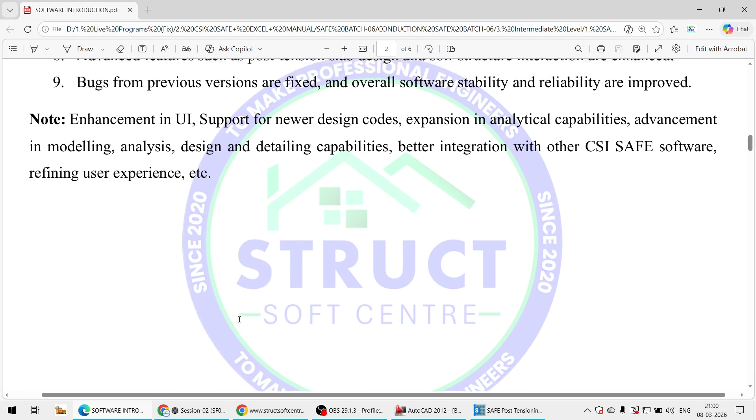First of all, we would like to recall all the things that we have covered in our last session. In the last session, we started the discussion about understanding this CSI Safe software, its introduction, its history, its full form, its application, and why this software is popularly used in industry for the purpose of designing substructure.

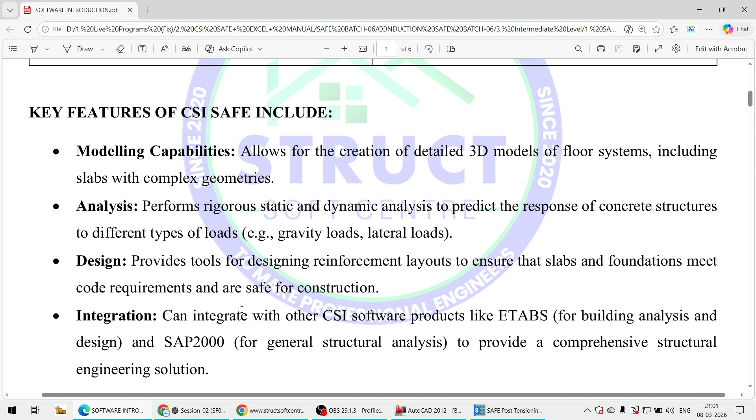Moreover to this, we were trying to understand the features of this CSI Safe software for designing your floor slab and foundation slab, and what features actually keep this software different than the other software options. So that we have learned in our last session.

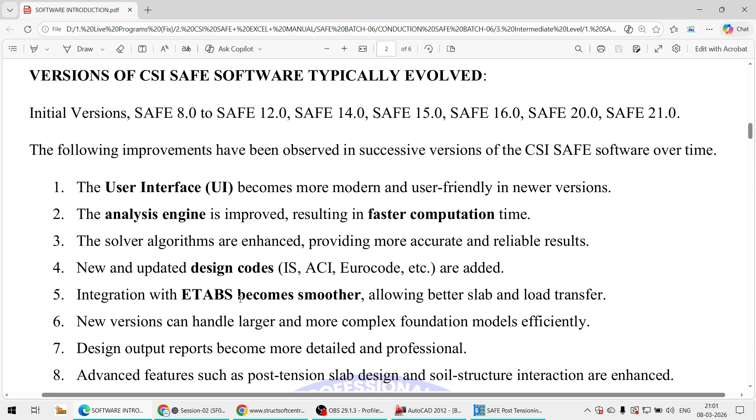Moreover to that, we were trying to understand, if you are going to work with different versions of CSI Safe software, what advancements, new things, and changes you will get in a new version over the oldest version. That also we were trying to understand.

By following all those things, we have learned how you can initiate this particular software, start this software with internet connection and without internet connection, and how the welcome screen of the software will be. That we were trying to understand in our last session.

Further, we have seen the interface, the user interface of this CSI Safe software in detail in our last session, and we concluded our last session on the point that we have to discuss the important commands of this CSI Safe software.

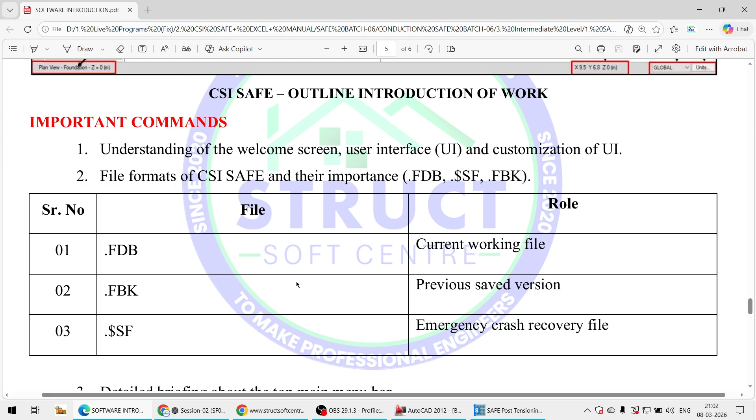So shall we finally start to discuss about the important commands of this CSI Safe software? Yes or no? Okay guys.

So next, the very first thing is to understand the welcome screen, user interface, and customization of the user interface of your Safe software.

As we have seen in our last session, when you open the Safe software, suppose I am going to close this software and freshly open it again. Once you click over this icon, it is going to be initiated, and this kind of welcome screen will be there. There is an option to start your new model, an option to start your existing model, and here the recent model files are actually available. I wanted to open this one.

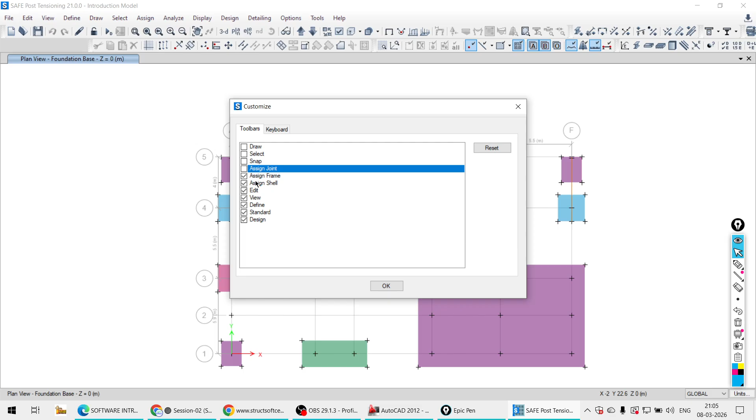Suppose here I would like to go to customize toolbar, so uncheck all of these things. When you are going to open your newly installed Safe software, this kind of interface you will get. There will be no quick access bar, no modeling option bars available, nothing is actually available. Only the top main menu bar will be available.

This is called the top main menu bar, as I earlier said. Now with the help of this top main menu bar, you can do everything, you can do anything, but it will be difficult. Why? Because every time you need to go to particular main bars or main options, and under that find the sub option. In the Define section, suppose I have to define the material property, so I should have to find the material property.

For the section property, I should have to find the section property. If I have to import something, I need to go to file, then I need to go to import.

If I want to edit this particular slab, I don't have the quick access bar, I don't have the shortcut key. If I have to model the slab, model the column, do any correction, do the joint modeling, or see this particular dimension, for doing anything, I need to go to a particular option.

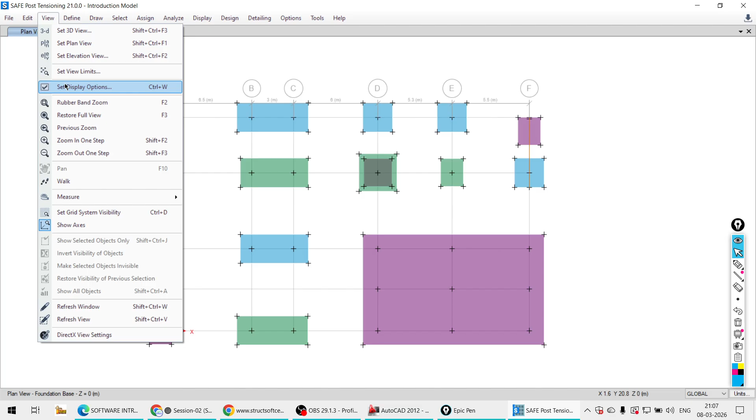So for the editing option, I need to go to edit option, and in that edit option you will get multiple options to operate. For the view option, if I click over view, these are the view options.

If you want to see the 3D view, the quick access bar is not there. Just now to create the 3D view, I simply clicked over the 3D option, so the 3D view got enabled. Now I cannot easily convert this plan view to the 3D view. I need to go to view and then change it to the 3D view. That is the problem.

Every time I need to go to main bars. In the define section, I need to go to define section, then I can define the material property, section property, load pattern property. If any option can be quickly accessed, my work time is going to be reduced. Then there is a define section.

In the define section, draw section is there. If I need to draw any plan slab, any beam, any reference line, dimension line, or reference grids, how can I do that? If I need to create any joint at any particular point to connect two joints, I need to draw the line. How can I do that?

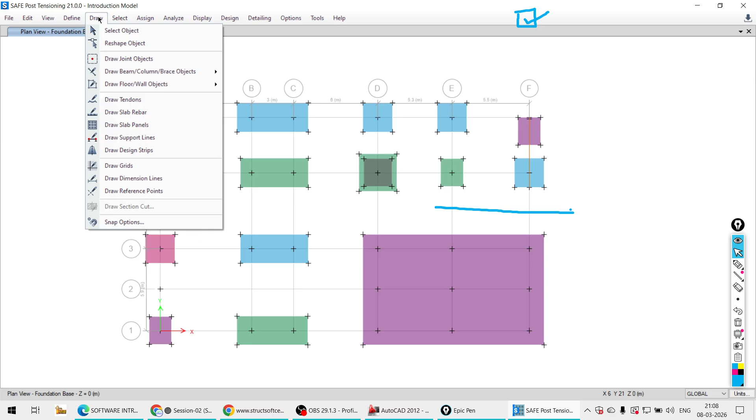I need to do it from the draw options, so I need to go to the draw option, then I will come to know all the options. Assign option is there, analyzing option is there, display option is there, design option is there. All these are the main options, and under each main option you get sub options. In design, all the options you will find under the design section.

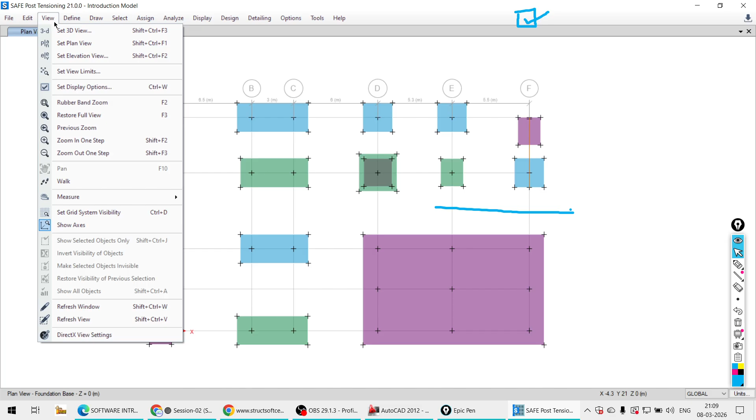These are all the options, you can call them sections: define section, draw section, select section, assign section. If I want to assign the point load, uniformly distributed load, area load, whatever type of load you need to assign, you need to go to the assign section.

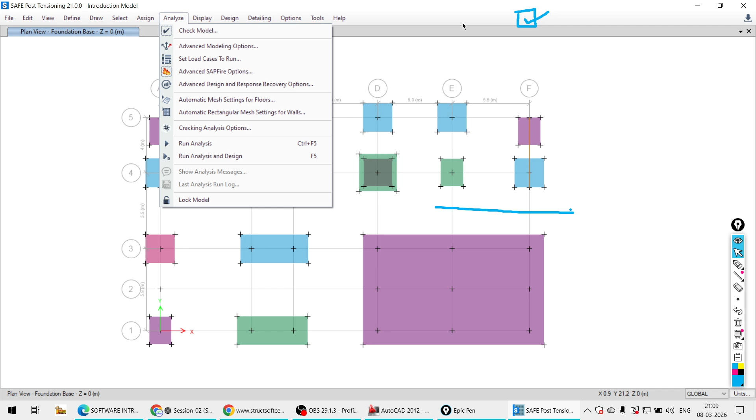There is no quick access bar, there is no shortcut key. So that is the need to have the shortcut keys, or otherwise to have the quick access bar. So we need to set the quick access bar first. If your welcome screen is your user interface when you open the software, and suppose it is newly installed, you will not have your customization, your quick access bar - that you won't be having.

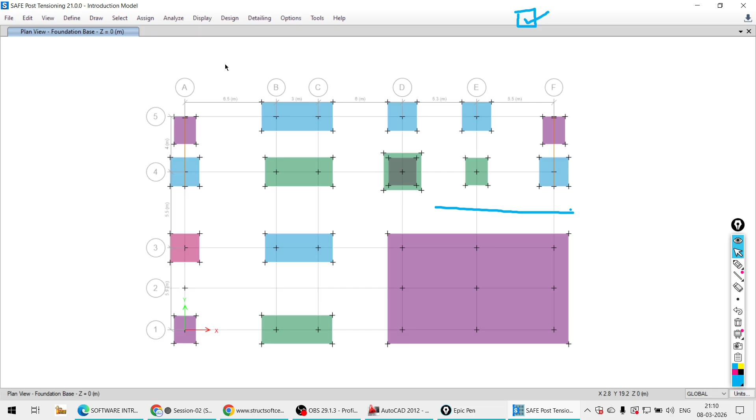Where will you get this quick access bar? Very simple - where the option is given, you need to go to the option. In option many things are there, one by one we will see. In option you will find the option of customize toolbar. Click over this customize toolbar.

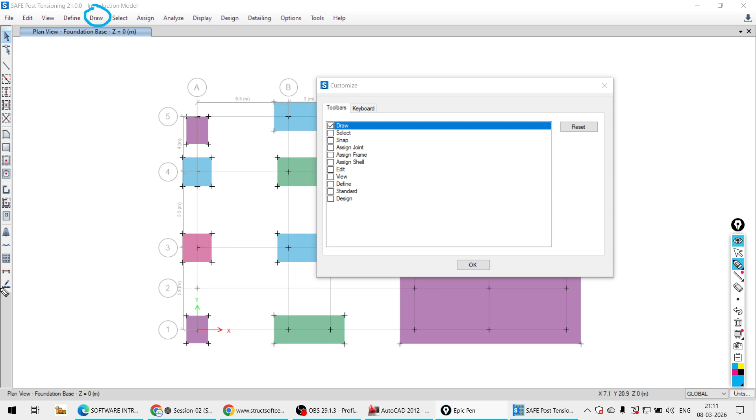In this customize toolbar there is an option of draw section on the left hand side. It is now created or added here. Draw section, this is our draw main option. Under this main section there are sub options. All those sub options are extracted in a quick access form in this draw option strip. Okay, now second, select option.

If you want to do anything selected, if anything to be deselected, whatever is actually present, and if you wanted to select all the things at once, all that you will be able to get from the select option.

So the select option bar here, it is now added. Now next, snap option, assign joints, assign frame, assign shell. If anything you want to assign to the joint, if anything you want to assign to the frame, if anything you want to assign to the shell. Assignment, okay, property assignment, load assignment, label assignment, anything assignment. Okay, see, try to understand when you are going to work with the software, whenever you want to do anything, right?

So first thing you need to define it, second thing you need to assign it, third thing you need to edit or correct it, and the fourth thing is to do the analysis, then design, then scheduling and detailing. So first thing is the modeling, drawing option. Second option is the define option. Here the define section is there. See, define section I am going to add here as a define section. Thereafter draw option is there, that is nothing but your draw option.

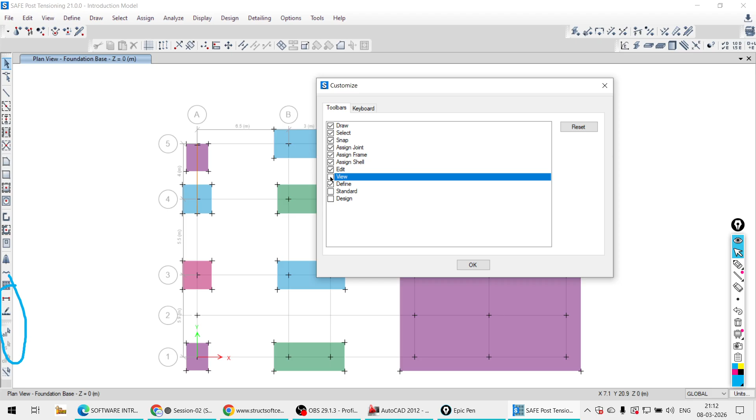Thereafter is the editing option. If you want to do anything to be edited, thereafter you need to do the assignment. Okay, load assignment, property assignment, everything. Thereafter is what? View option. What things you want to keep in view, what things you don't want to keep in view. So view option, then standard option, then design option. So all the quick access bars and quick options are actually added here.

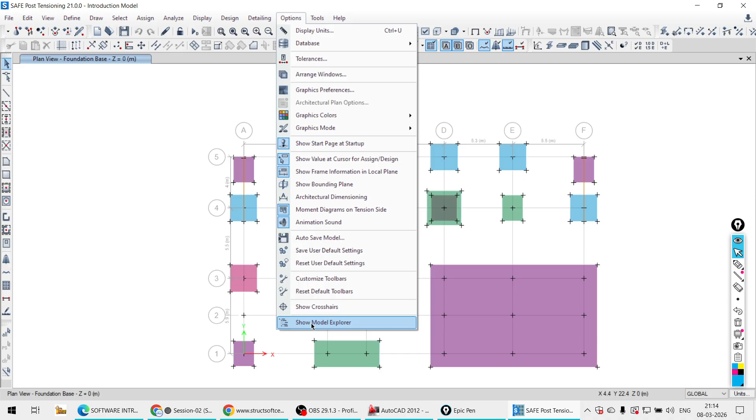Now second thing, you may have seen any of the videos or you are going to see other videos for learning, and you will say, sir, when I see that video, I am getting one section here, model explorer, but in our software it is not available. So suppose you want to have the model explorer to do the things quickly, that is also one option. So go to the options, and here you will get the option of show model explorer. Once you click on show model explorer, now here it is easily available. Model explorer, model property, structure property, properties, grouping, loads, and many things are there.

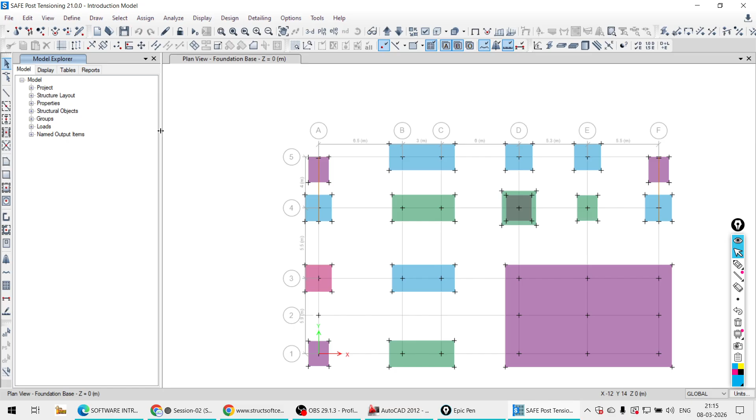What its application is, I will explain later. मैं इसका application बताऊंगा. Okay, if you are interested to work with the model explorer, you can proceed in this way, but I am not practicing with the model explorer, so I don't need it. So what I can do, I can close it. You will say, sir, no, I am familiar with the model explorer. No problem, go to the options, go to show model explorer. Now here it is added. If you don't want to work with this, close it. Understood? Yes or no? Model explorer.

Okay, this is the interface setting. Clear? After this, let me show you. Welcome screen we have seen, user interface we have seen, and its customization we have seen, and whatever further things need to be discussed, we will discuss in time. Okay, second, file formats of your CSI SAFE software and their importance. Guys, very important point we are going to discuss. Please pay attention. What are the different file formats of your CSI SAFE software?

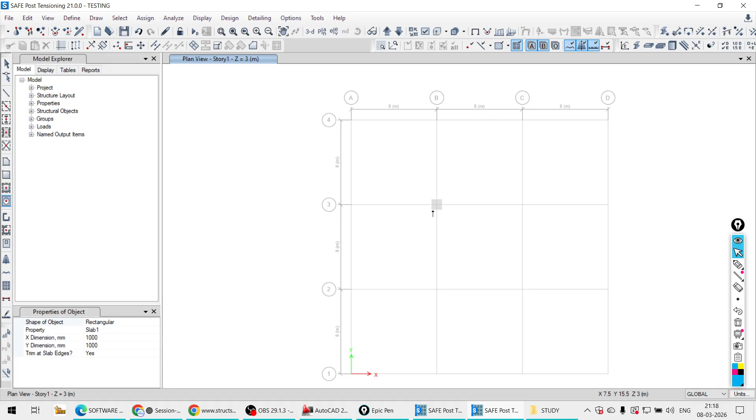3 files are there. Okay, now in this new project, just for understanding, I am going to draw the slab. This is the slab, and I am going to perform the analysis. It is showing the errors and things. Let the analysis be completed. Okay, so the analysis has been done.

Go to your folder. Now guys, how many files are there? How many files are there? The files are present. One file is still not created. Okay, now unlock this model. See here, no backup file is available, the FBK file. I'm trying to see whether the backup file is created or not. The backup file is not created, so I'm going to do a modification in this.

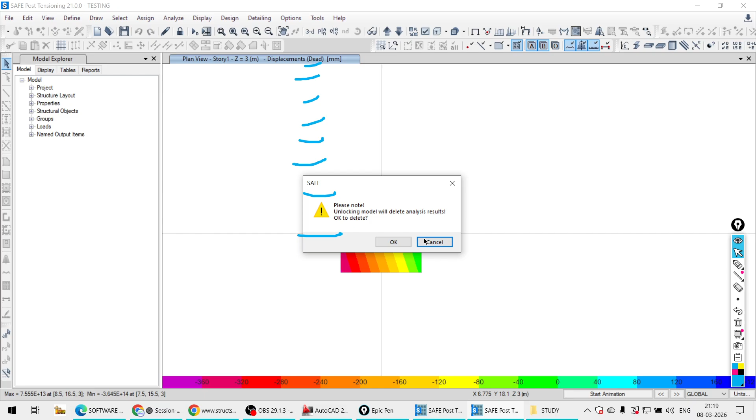Okay, I'm going to create the column. Now perform the analysis. Let the analysis complete. Okay, now go to your study folder. The backup file is not created, but let's see. There is one $sf file, one safe.fdb file, and one more file will be created by the software when you actually work on a real project. Here we have not done anything, that's why that file is not created. One more file will be created here as the fbk file, which is called the backup file.

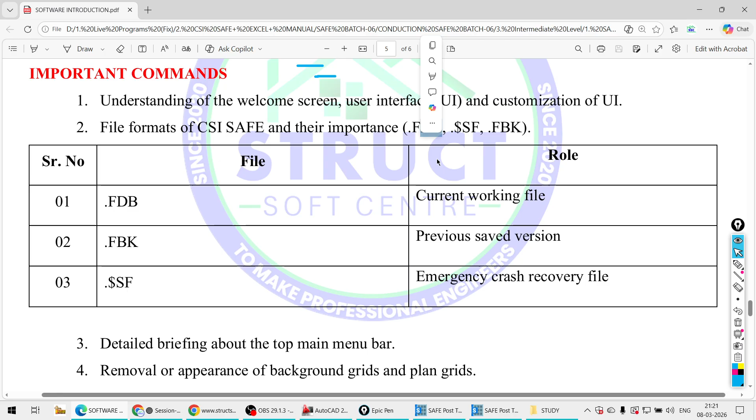This is the model file, and this is also a model file, but their applications are different. Let me show you my project. Here, general. Yes, see what files are available: $sf file, fbk file, and fdb file. The fdb is your current model file, where you are working right now. The file is created in the fdb file format.

Now suppose you are going to do any modification, the previous file is going to be updated as an fbk file. The previous edition or correction is going to be updated as the fbk file, which will be your backup file. This is your current ongoing file.

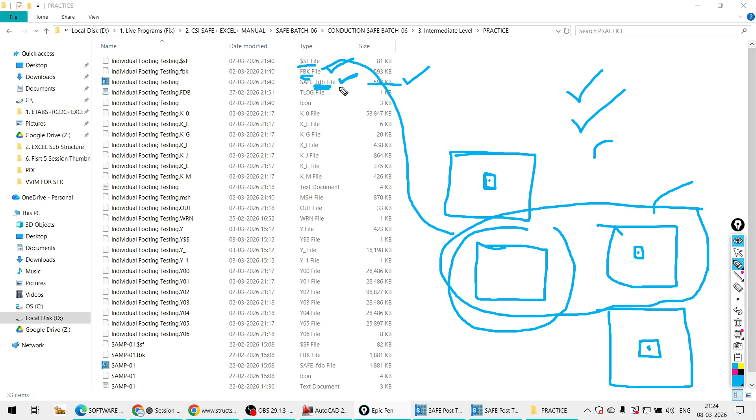FDB. That is going to be updated as what, FDB. Understood?

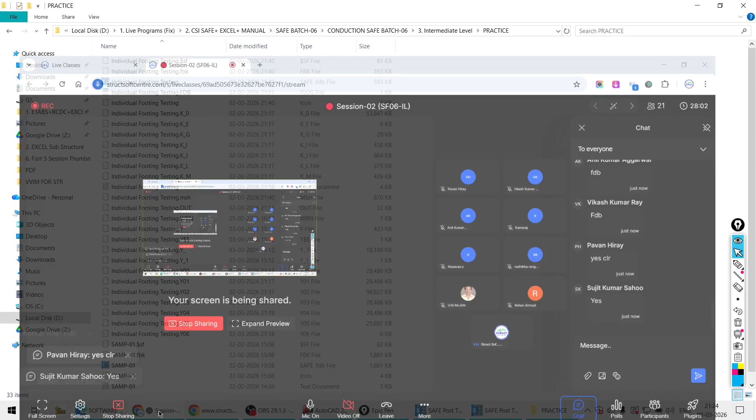Why we are learning this? Okay, what is the application of this? So let's try to understand what is the application of this. For example guys, you are working over this particular project, and by any reason, by any chance, by any mistake, your ongoing project is crashed. Suppose you are working and suddenly the light cutoff is there, power cutoff is there.

So sometimes your file will be what? Crashed. When you are trying to open that file, it will not open. First thing. Second thing, there are some situations where suppose you are going to execute anything and that thing cannot be undone. Like for an example in the ETABS software, suppose you are going to create a model.

Once you create your model, there is an option to assign the fixed support at the base. Or tell me, at any other level you are assigning the fixed support, or only at the base you are assigning? Fast, hurry up. You are assigning the fixed support at the base or at any of the levels? Now what thing is needed to do?

Now in between one more file here, it is going to be created by the software as $SF file, and when suppose you are using the ETABS, so $ET file. As it is SAFE software, so it is creating the $SF file. Now what is its application? So it is just similar to that of your FDB file and this SF file. So it is another version, another mode of the file.

Okay, so whenever you have to share your file with someone else who is using any other version, or you are not knowing what version of the software he is using.

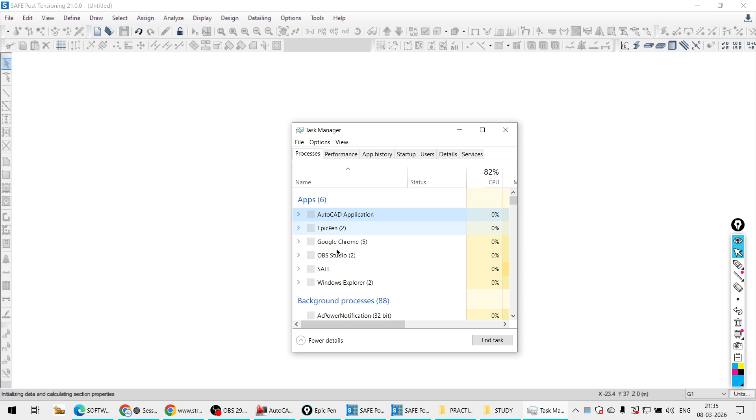Okay, what is happening? Okay, let me open, save again.

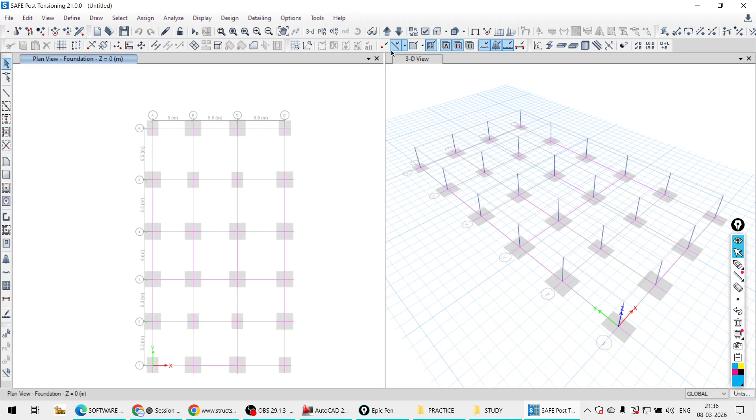So suppose you have shared me the file, so I will go to import. In import, the $SF file I need to find from a particular folder, wherever you have downloaded it. Suppose this is it. See, master sample, open this. See, your entire project here, it is opened or not? Your whole project has opened, yes or no?

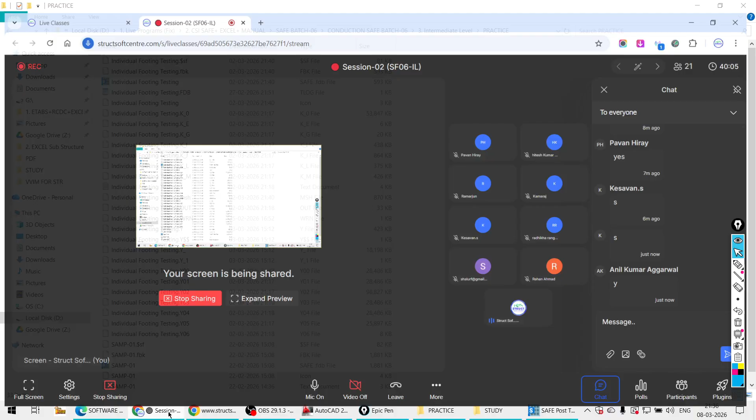Clear? So this is the application of these three file formats: the .$SF file, the .FBK file and the .FDB file. Clear guys? Understood the meaning of all three? Yes or no, Pavan? And all these things are applicable for your ETABS as well. The same things happen in ETABS. Okay, fine. Now, what is the next point?

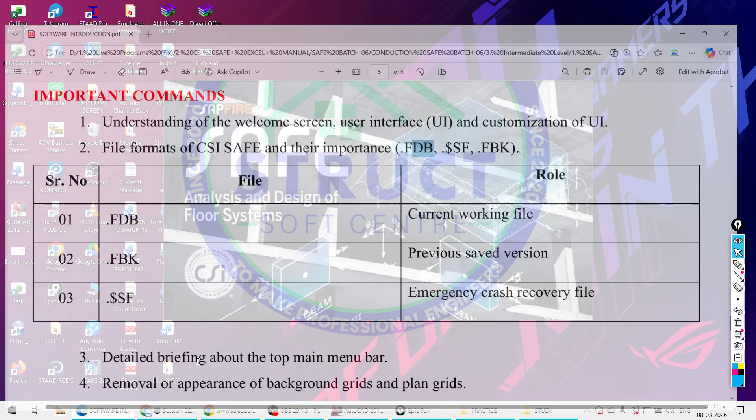Detailed briefing about the top main menu bar. We already have covered this point. Removal or appearance of the background grids and plan grids. Grids are a very important thing when you are going to initiate any new project, when you are going to initiate the modeling work. Without having the grid, you cannot create the model effectively. You cannot create your model with a surety of making your modeling work free of error.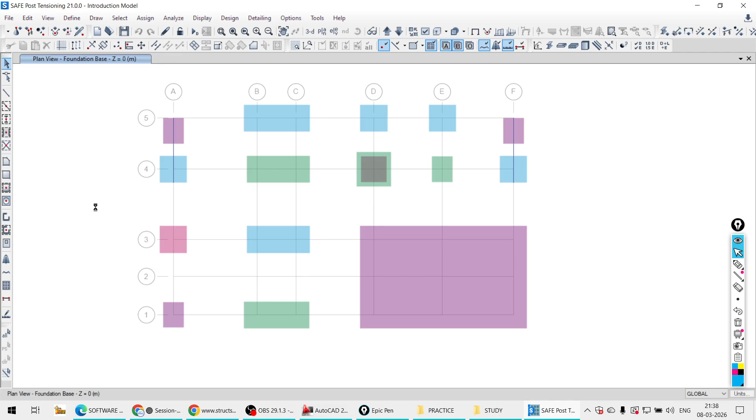If you don't take the help of the grid, there will be chances of modeling error, analysis error, design error. Many challenges will be there if you are not going to take the help of the grids, or in other words, the reference lines. So the grids are very much important. As you can see here, there is a presence of the grids. These are the grids, the gray lines available here.

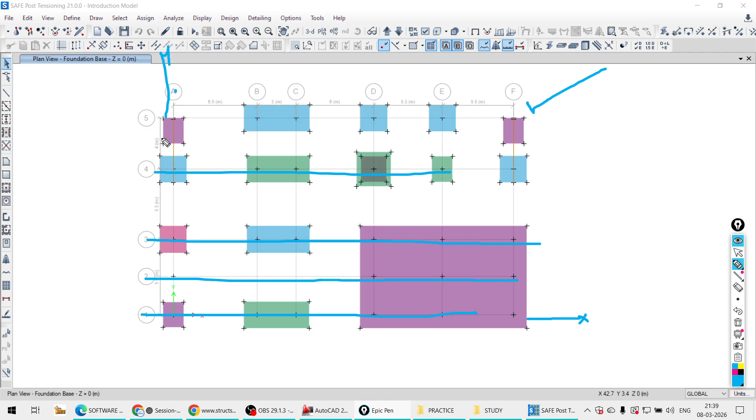These are the grids, and they will be available in both directions, x direction and y direction, and this particular format of the grid is called the Cartesian form of the grid. Means the grids are available in x direction and in y direction. In plan, the principal directions: this is the x direction, this is your y direction. So this is the Cartesian form of the grid. So how to keep these grids in view, how to keep them out of view?

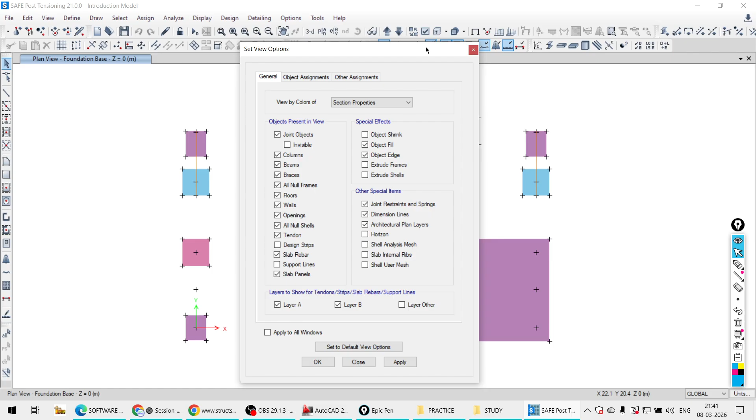Background grids - if you need them in the background, you need to go to set view options. This is all about the view we are learning about. So for that reason you need to go to view, and in view you will find the option of set view options. Whatever display settings you need, you will get from this option. Many things are actually present here, we will discuss that later.

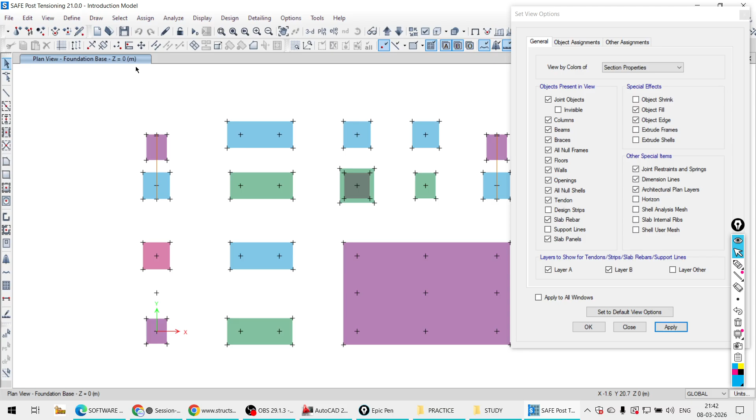So here, horizon - once you click over this horizon, let's say apply. See, background grids are available. These lines, not the grid, these are reference lines, having another purpose, we'll see that later. So how to keep in view - horizon on, horizon off. This is off, this is on. You need to click over apply. Once you uncheck this box and apply, it will not be in view. Once you check this and click apply, it will be in view.

So this background tracing or gridding - background gridding and the front griddings or grids or reference lines, how to enable that - right click on the window and set grid system visibility. Have you got this? So I don't need this background horizons, so I need to uncheck this and apply. This is all done. Clear guys?

This second thing. Okay, what next?

Global axis, local axis, natural axis and their appearance and disappearance in the software. How many of you don't know the definition of global axis, local axis, natural axis?

Who knows, who doesn't know? Hurry up fast, just write in the chat box. Knowing or not knowing, write fast, otherwise I will skip it because it is very basic. Those who know say knowing, and not knowing - hurry up.

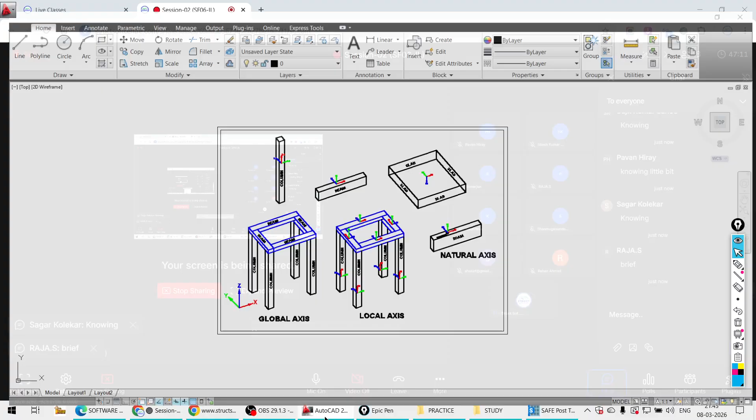All are not responding. Only a few responded, so I'm going to skip it. Knowing - most of you are knowing. Okay, no problem, I'm giving a brief knowing, little bit. It's very simple. Okay, brief, actually it's a very simple thing.

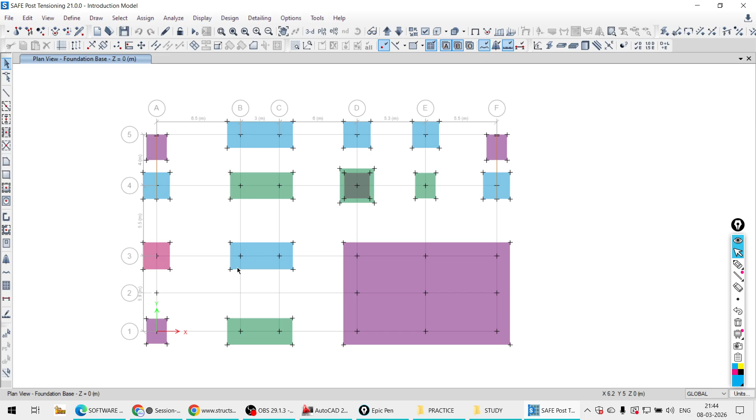Global axis - by the name you can understand it represents your structure globally, your project globally, or the axis system which covers your structure, or represents your entire model, your entire project. That axis system is called the global axis system. So when you see it in your SAFE software, in a plan view, the axis system is present here. When you see the 3D view, this axis system is present in 3D view as well.

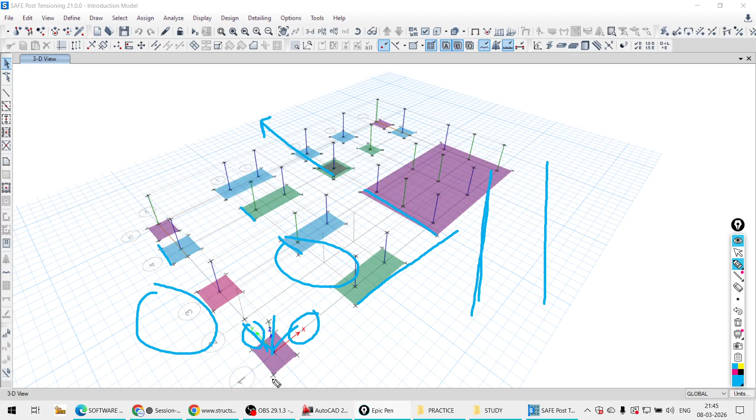So it is globally going to represent your entire model. Whatever is running in this particular direction is along the x direction. Whatever dimension runs in this other direction is along the y direction, global y direction. All the things you model over the height, that is along the z direction. So in the entire structure, whatever goes up is along the global z direction, global x direction, global y direction. This is the global axis, representing the entire structure. This is called the global axis system.

And second is your local axis system - this axis, see this main model is made up of different elements. What is it made of? It is a solid model, solid structure, made up of solid elements - beam, column, slab, footing - all the elements actually have 3 dimensions, they are solid elements. So it has its own axis system. Since it's a solid element, it will have its own axis system - so each column has its own axis system.

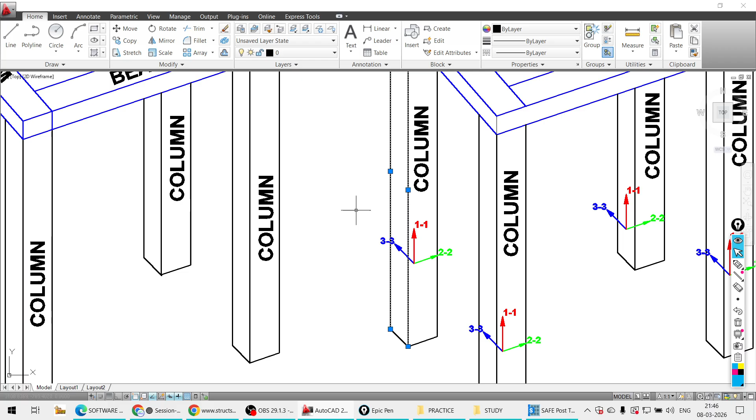Each column, each beam, each slab, each footing, each shear wall - all these things have their own axis system. Why? Because this column has width, this column has length, this column has height or depth. So to define these dimensions, each element has its own axis.

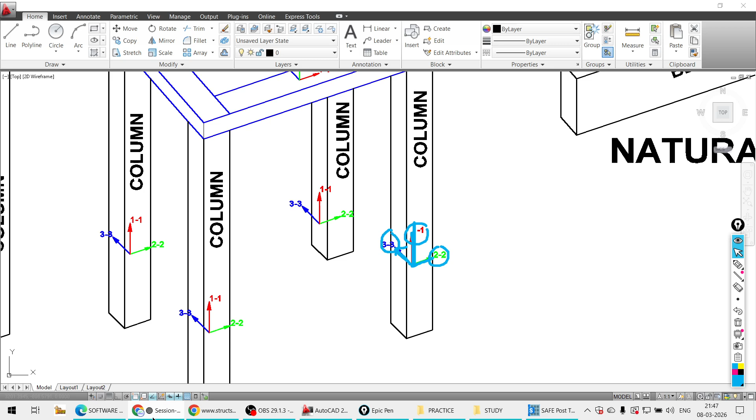So the axis system which represents an individual element, what is that going to be called? Local axis system. Every member will have its own axis, that is going to be called local axis.

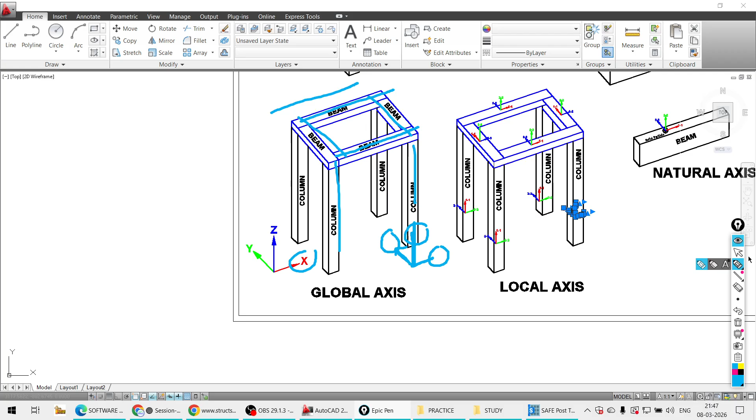Now this axis is not having any concern with the other element, other component part. It has nothing to do with others. It is only having concern with this respective element, respective column, respective beam, that's it. So this is going to be called local axis.

And again guys, this particular element - firstly the entire model is made up of solid elements. Now this solid element is actually made up of solid particles, yes or not? It is made up of solid particles. And this solid particle will also have its own axis system. Every solid particle together will form your particular member.

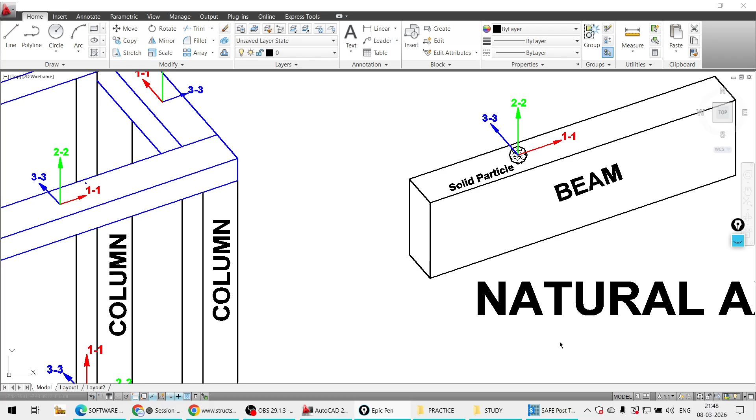So this particular solid particle is having its own axis system, and it is going to be represented by its own axis system, and that axis is called natural axis system. But in software it is not needed to see the natural axis for any particular element. Our concern and study will be limited to global axis.

Our study will be limited to your local axis as well. We need these two axes, we have to focus on these. So in the software, how will you see the local axis of your particular member and global axis, and how to keep it in view, how to remove it from view - you need to understand that.

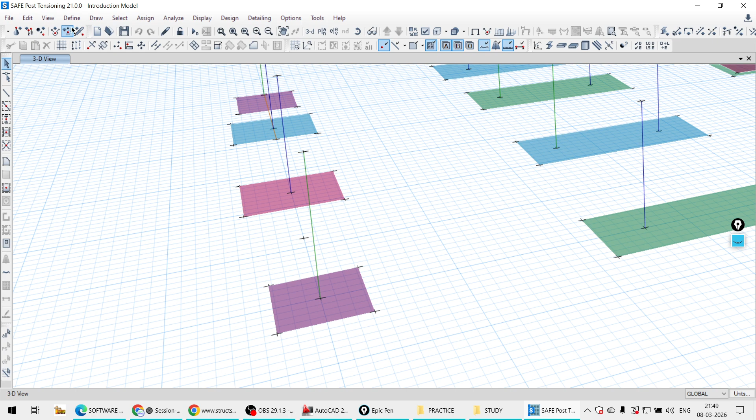So first of all, let me turn off the grids. So this is global axis. Suppose I don't want to keep it in view, go to view and show axis. Once you click over this, it will be off, it will not be in view. Go to view again, there is an option of show axis. It is off, now it is available. Once you go to show axis, now it is not available. Once you go to show axis again, now it is available. Clear, yes or no? This is global.

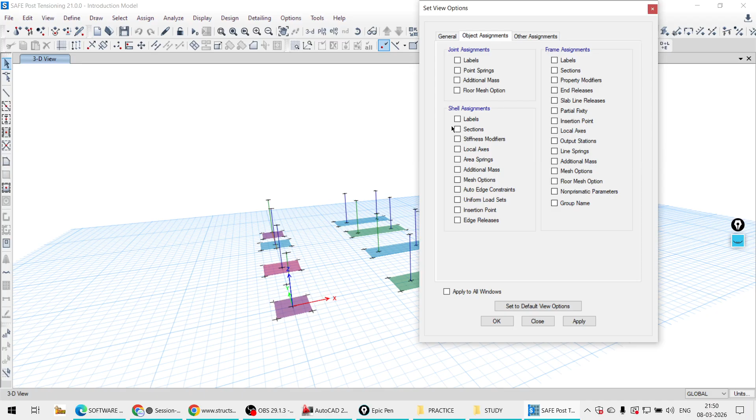Now object assignment - in object assignment I want to see the local axis of the slab element, shell element or slab element. Apply local axis over this. So look, every slab's own axis system is visible to you. This is the global axis, this is the global axis, and now each slab has its own axis system, yes or no? Every slab's own axis system is visible.

Yes, this is the axis system, its own axis system. You will say, sir, for the column it is not visible. Yes, column is a frame element, so I need to choose frame. For the frame element I want to see the local axis - check this, apply. Now look, the local axis of all frames is also visible to you.

Yes, if there is a beam, that beam will also show its own axis here. This is the beam, right click show selected object - see here is the beam, it's showing the local axis of this beam. Because beam and column the software is treating as frame elements, so it is showing here. Getting the point? So local axis of your shell element means the slab element or shear wall element, and the second one is your local axis of your frame element.

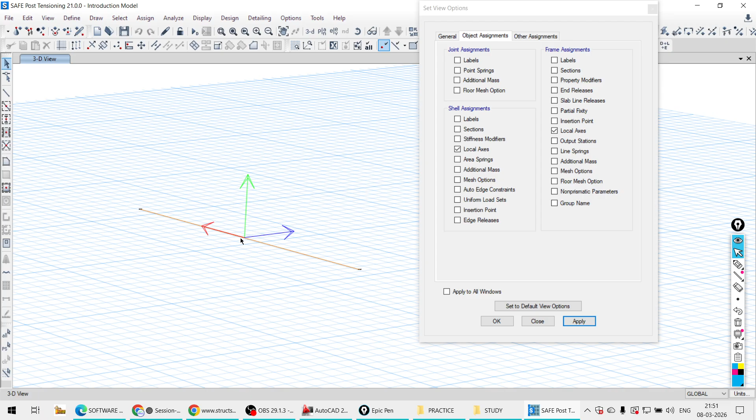And if you want to see the global axis, it is also present here. You will say that sir, I don't want to see this global axis - go to view and say show axis, it will not be in view, right? So right click show all object, now everything is there.

So hope that's clear to all of you - what does mean by the local axis, what does mean by the global axis, what does mean by the natural axis. Okay, graphic preferences, graphic mode and graphic color. Now coming back to the

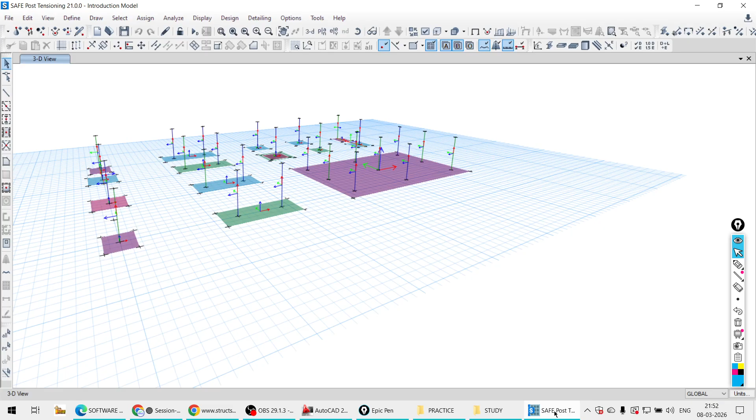software, go to the plan. Very important thing guys. Undeformed shape, normal view, go to set view options. I don't want to see the local axis of shell and frame, so I'm going to uncheck this and apply. Now it will not be in view.

Graphic preferences. Go to option, graphic mode. You should always work with the standard graphic. Please pay your attention, I'm telling you a very important option here.

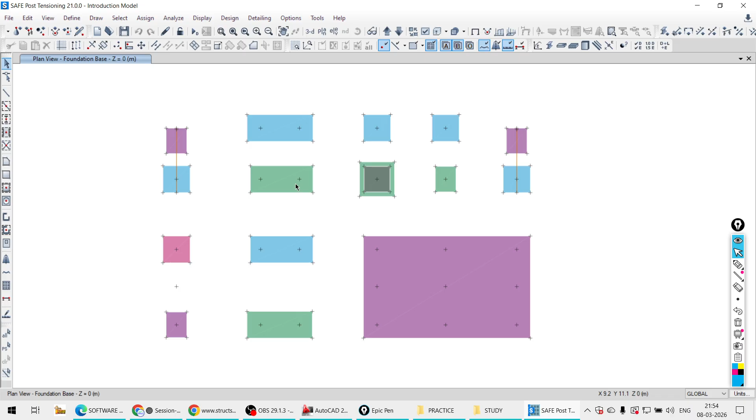For the beam case, now here it is visible. Here it is visible, midpoint. Here it is visible - now it is showing for me.

But sometimes students, when they open the model file in this DirectX form - go to option graphic mode, DirectX form - they are not able to get their midpoints. Their midpoint doesn't show at all, even though they have selected the option line ends and midpoint. This option, even if it is selected, as it is showing here, it's fine for me telling, but normally this problem happens. Many times students send screenshots saying sir, I am not getting the midpoint, I have done everything you explained, but I am not getting the midpoint.

Why? So I instruct them, please go to graphic mode and keep it to standard graphic. Once you click on standard graphic, now here it is clearly visible, and with this option it is easy to execute everything. Understood? The view will be very clear. But if you work with the DirectX option, it will be in a blurred form and it has another application issue.

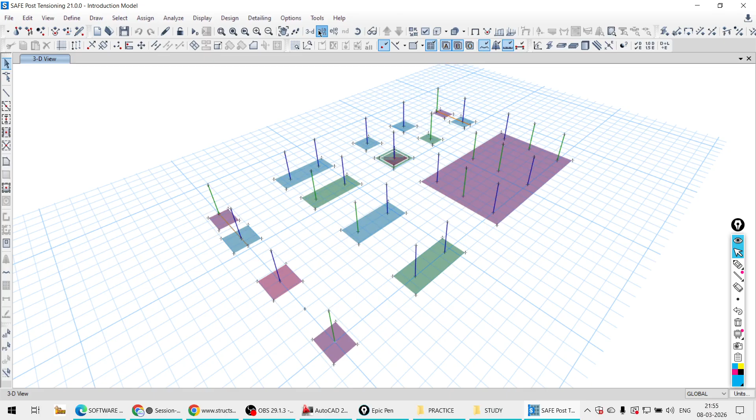So don't work with that. Look at the 3D view - it will be very difficult. Go to the plan view. So you should always work with the standard graphics. Clear? Whether you are working with ETABS or working with SAFE.

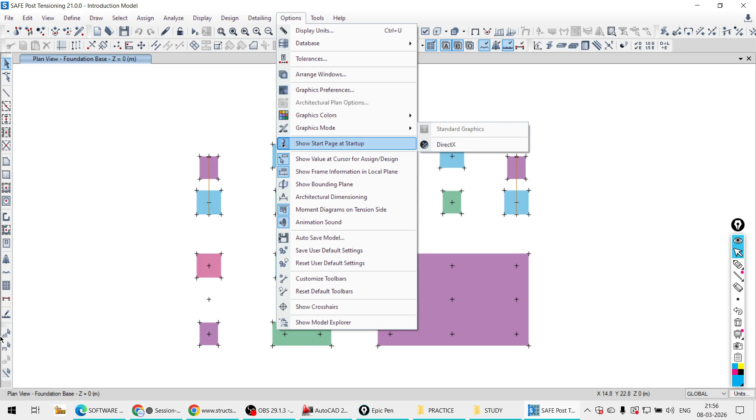Okay, it is only the view option. Okay, analysis, modeling पे कुछ फर्क नहीं पड़ता है. It is just the view option. So always work with the standard graphic option. हमेशा standard graphic option के साथ ही आपको work करना है. Got this? Right click, set grid system visibility. Okay, so now grids are available.

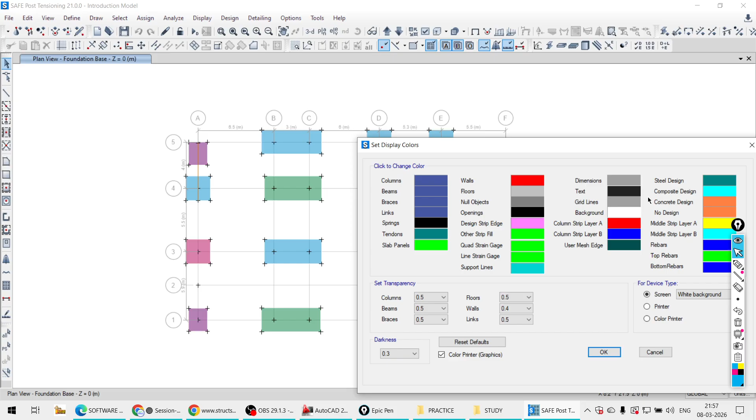Second option, go to option graphic colors. अभी front में आपको graphic colors क्या चाहिए? So very first display colors. Very interesting guys. Now you will say that sir, as I have created the grids, this grid is of gray color. Why is it of gray color? I want to have another color. So here, actually the grid color option is another one. Okay, so when you are going to see, grid color is there, and go to your option graphic color, display graphic color.

Okay, so जब आप by default slab को मॉडल करते हो, फाउंडेशन स्लैब को मॉडल करते हो, तो the floor slab by default color will be your gray one. कैसा दिखता है? ग्रे. You will say that sir, whenever I am going to model the slab with a default setting, the slab default color should be, let's say, green color. Okay, so यहाँ पे मैं इसको default as green कर देता हूँ. Okay, got this? Here beam I have modeled, so the beam default color is blue. You will say that sir no, whenever I am going to model the beam, that should be of red color. वो रेड कलर का होना चाहिए.

इफ़ यू आर गोइंग टू टेक ए प्रिंट, अब प्रिंट में सपोज यू आर नॉट हैविंग द कलर प्रिंटर, black and white printer you are having, so column will be of this color, beam will be of this color, bracing will be of this color. तो ये आप changes कर सकते हो. What element you want to show as dark, what element you want to show as light, everything you will get from here. यहाँ से आपको मिल जाएगा. If you are having the color printer and you want to export your model, आपको ये मॉडल को एक्सपोर्ट करना है, इसका प्रिंट लेना है.

So if you are going to work with the color printer, the column is going to be printed as blue, the beam is going to be printed. Now I wanted to change beam and column, मुझे कुछ difference चाहिए. तो what I will do, I will keep this maroon color for this beam. So वैसा print होगा. So these are the changes on a screen. क्या चाहिए आपको? This is on a screen.

White background, black background. Okay. See, black background. Some of the professionals, they are interested to work with the black background. This is the black. So tell me, would you like to work with the black background or white background? किसके साथ वर्क करना है आपको? Black, white. Okay, this is your choice.

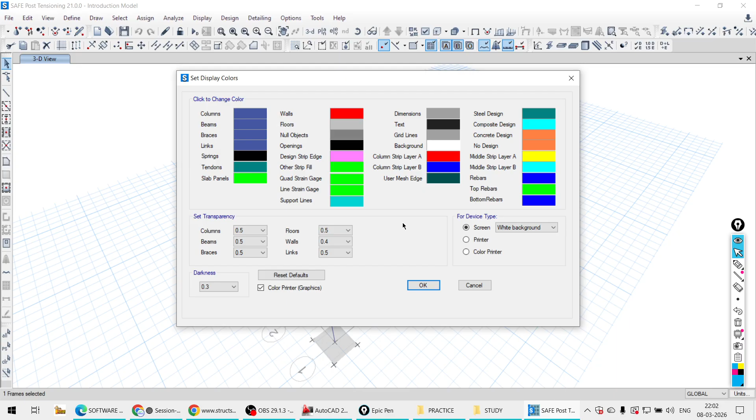Okay. Now graphic mode we have seen, graphic colors we have seen, graphic preferences. Now it is about the text setting. Now after the analysis, after the design and during the modeling, suppose for example here the grid size dimensions, it is 5 meter, it is 3 meter, it is 6.5 meter. You will say that sir the text size is very small, I am not able to see that. What is the value, what is the dimension, कितना है मुझे दिख नहीं रहा है. So please increase the size.

Likewise, when you are going to perform the analysis and you are getting the stress value, bending moment, shear force, like this, you will be in trouble. Sir मुझे दिख नहीं रहा है, I wanted to have more text size. So for that reason go to options, graphic preferences. Click on this graphic preferences. Now here the text size changes you can do. तो यहाँ पे text का formatting आप change कर सकते हो. Right, that I am not going to do here.

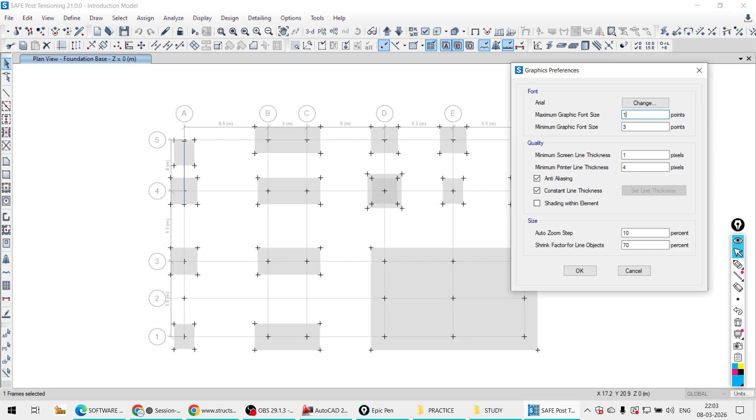Now text maximum graphic font size, minimum graphic font size. Maximum कितना होगा, maximum I wanted 10, minimum is 3, so maximum 10. Okay, बढ़ गया. Now again go to options, go to graphic preferences, maximum up to 20. Okay.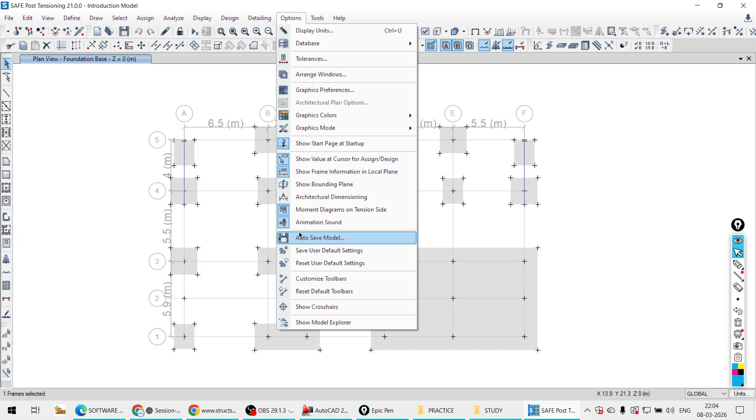Okay, so we have seen this detailed briefing of the main menu bar, background grids, global axis, graphic preferences. Now tomorrow we'll discuss selecting, deselecting, previous selection and many things about the editing of the existing model. सारी चीज़ें हम लोग कल डिटेल में कवर करेंगे.